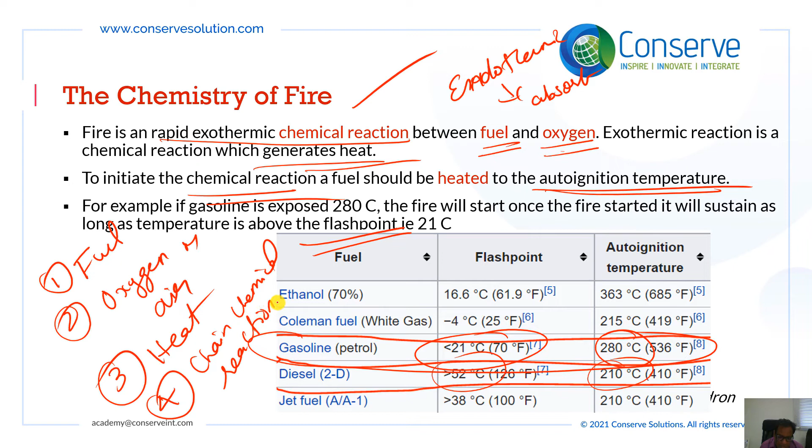And number three, the fuel will not get automatically fired. It has to be heated to the auto-ignition temperature. That is, heat is required to take the fuel to the auto-ignition temperature. And number four, there should be a continuous chemical reaction, that is a chain chemical reaction, the exothermic chemical reaction. So these are the four components required for fire to happen. These four components, the fuel, the oxygen, the heat, which is required to start the combustion, and the chemical reaction, are called the fire tetrahedron. A tetrahedron is a solid with four faces.

So the base is the chemical reaction and the three faces are oxygen, heat and the fuel. So the solid fire is a solid with four surfaces: chemical reaction, oxygen, heat and the fuel. So to extinguish the fire or to put off the fire, any one component of these four should be removed.

Either you should remove the fuel, you should remove the oxygen or cut off the oxygen, you should cool down below the flash point or fire point, or the chemical reactions should be stopped. So if you remove any one of these four components, the fire can be put off or extinguished. This is very important to understand to design a fire protection system.

So in this chapter, we discussed the importance and objectives of fire protection and life safety systems. Then we discussed various subsystems in fire protection and life safety systems. We discussed active and passive fire protection systems. We discussed the fire alarm system. We discussed the building egress or exit system, and we discussed the smoke management system. And finally, we concluded by understanding the chemistry of fire and the fire tetrahedron.

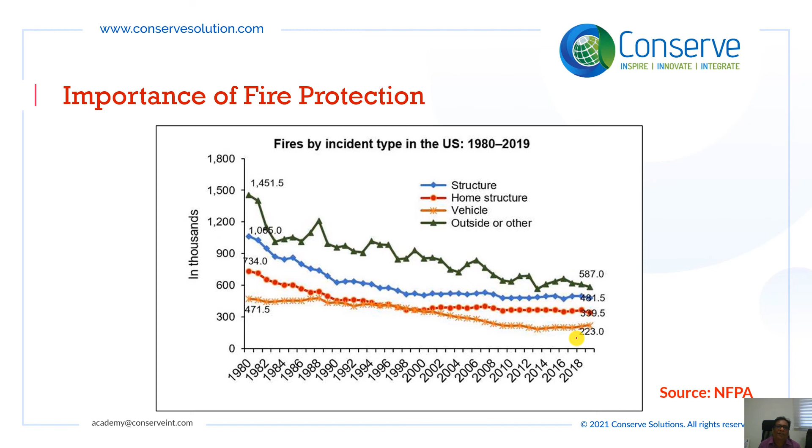Before concluding, let me quickly summarize our discussion in Chapter 1, Introduction to Fire Protection and Life Safety Systems. We discussed the importance of fire protection. There are a significant number of fire incidents which show that every building and every asset should have a life safety and fire protection system. There are two main objectives for a fire protection system. Number one, to protect the building occupants from injury and loss of life, and number two, to prevent damage to the property and valuables.

Systems in fire protection and life safety can be broadly classified into four. Number one, fire protection system, active and passive. Number two, fire alarm system. Number three, building egress system. And number four, smoke control system or smoke management system.

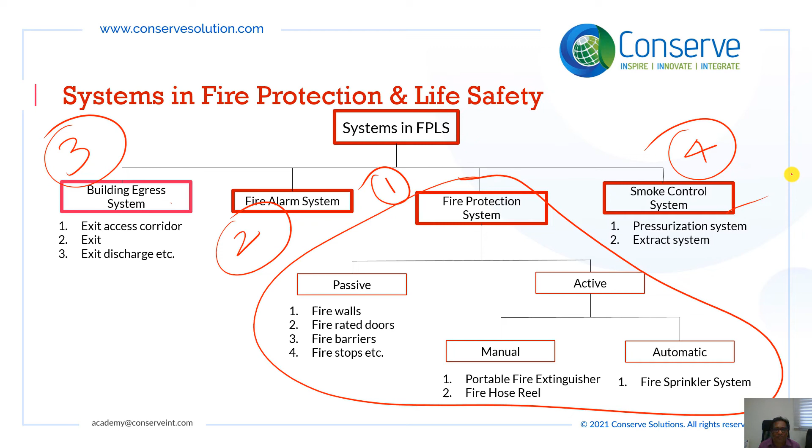Passive fire protection system aims to resist heat by having materials which can resist heat. For example, the walls and the floors should be fire rated. The fire rating is expressed in hours, 1 hour or 2 hours. So passive fire protection system aims to resist heat.

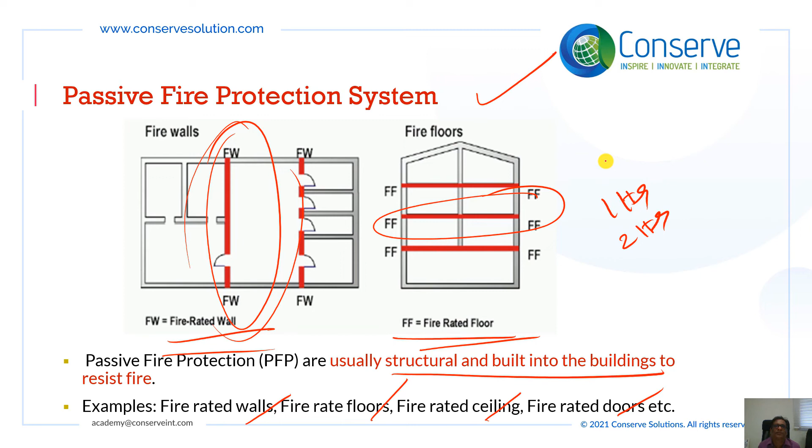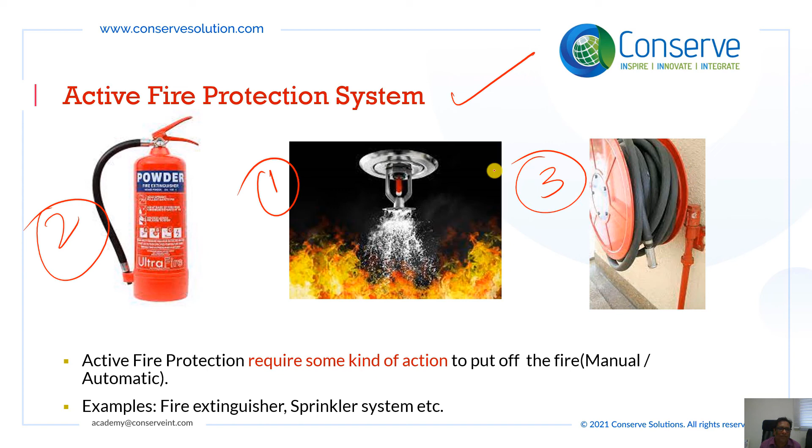Active fire protection system aims to put off fire by external means. The external means can be manual or automatic. So sprinklers are automatic, fire extinguishers are manual, and hose reel systems are manual. So we discussed all these systems in brief.

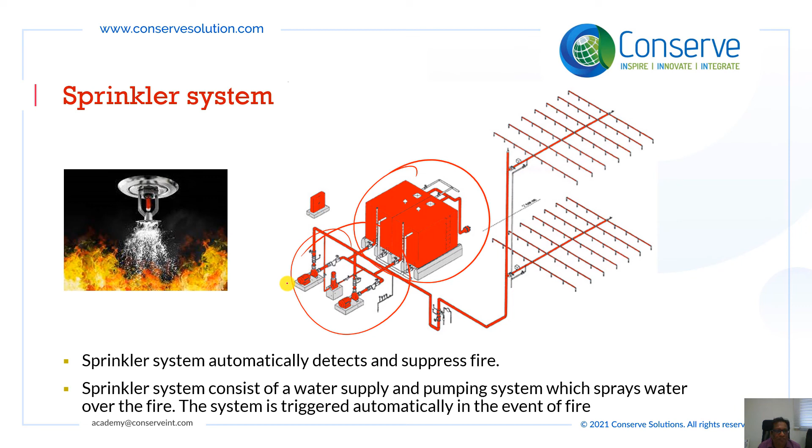Sprinkler and hose reel systems are connected to the same network of water tank and pumping system. Sprinklers are automatically triggered in case of fire. They spray water over the fire and extinguish the fire. The hose reel system is operated by the occupants. If they see any fire, they can use the hose reel to put out the fire.

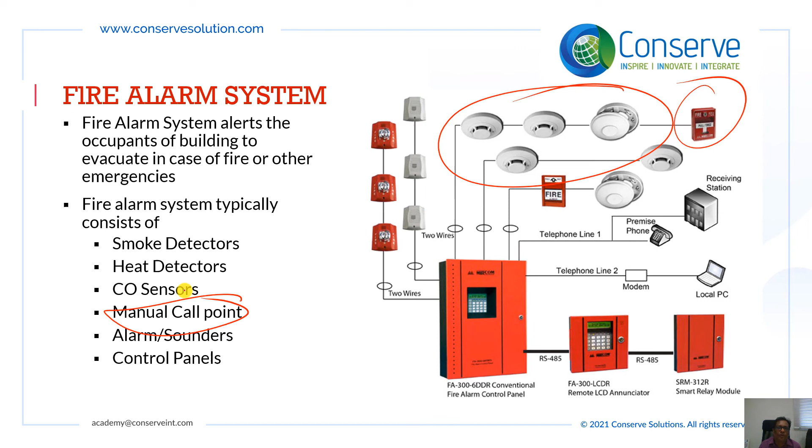Fire alarm system generates a sound in the event of fire or any emergencies. The fire alarm system can be triggered either by sensors. There are a lot of sensors, smoke sensors or carbon monoxide sensors or heat detectors, or they can also be triggered by a manual call point. So if anyone sees fire, they will switch the manual call point, which will trigger the fire alarm and generate a sound for everyone to evacuate the building. This is the fire alarm system.

And then we discussed the building egress system. Egress means exit. So the purpose of the building egress system is to provide a safe, unobstructed, protected pathway to exit the building in case of fire. So it has to be remembered that the egress route, the exit route, has to be protected by the smoke management system and passive fire protection system.

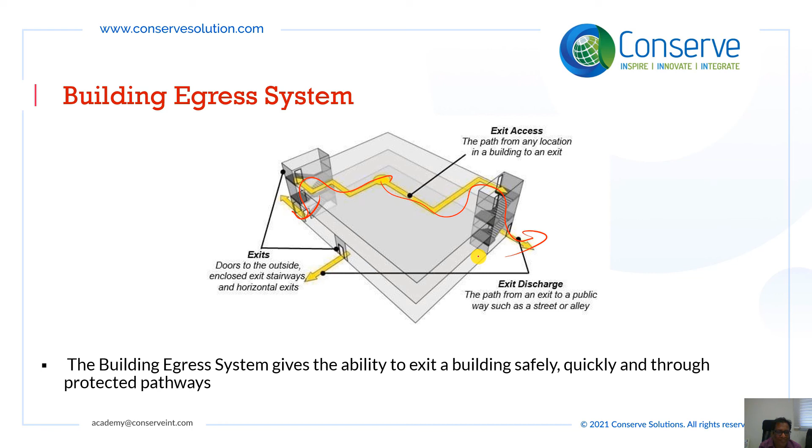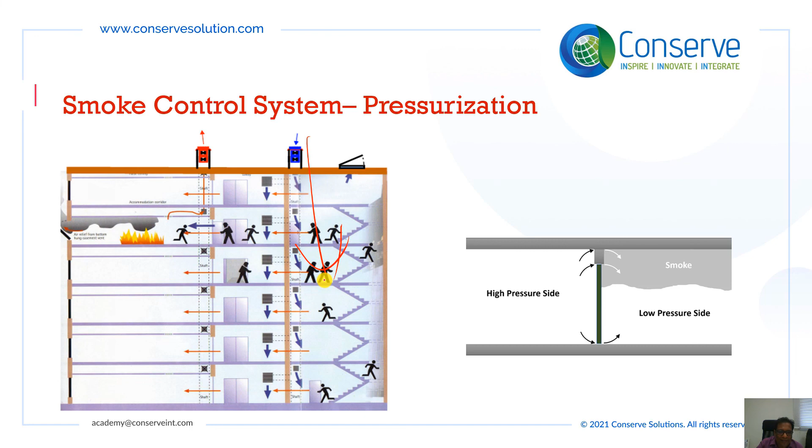Then we discussed the smoke control system. There are two types of smoke control system: pressurization system and extraction system. So the corridors and staircases have to be protected by pressurization so that the smoke does not enter these areas, because this is the exit way or the egress way. This should be protected from smoke and fire. So this should be pressurized. There will be airflow into these areas which will keep the area pressurized.

Smoke extraction is generally done in atriums or basements to remove the smoke. So generally one side of the building extracts the smoke and the other side of the building is pressurized to protect the egress way or exit route from smoke.

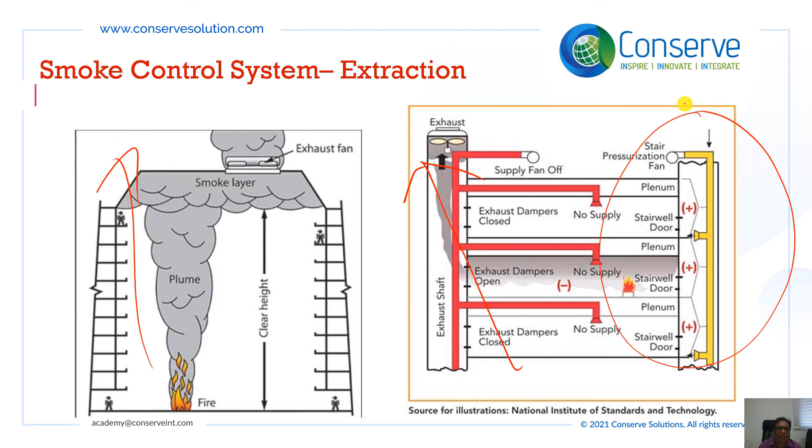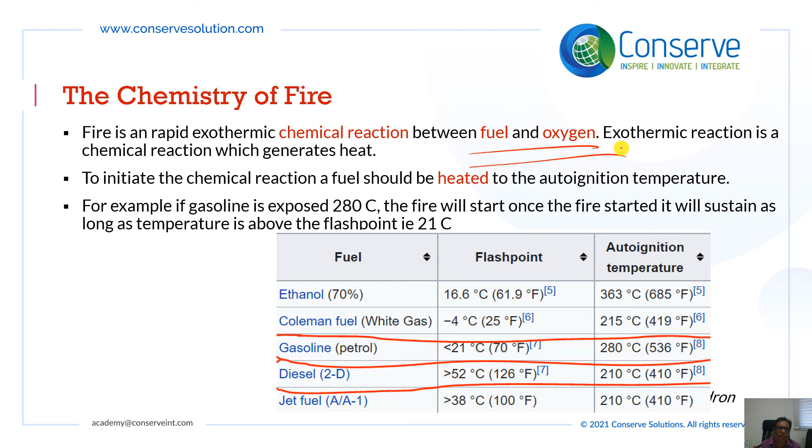And then we discussed the chemistry of fire. Fire is a rapid exothermic chemical reaction between fuel and oxygen. So there are four components in fire: one is the fuel, two oxygen, three heat, and the chemical reaction. These four components are called the fire tetrahedron. A tetrahedron is a solid with 4 surfaces. So the 4 components refer to the 4 surfaces of a tetrahedron.

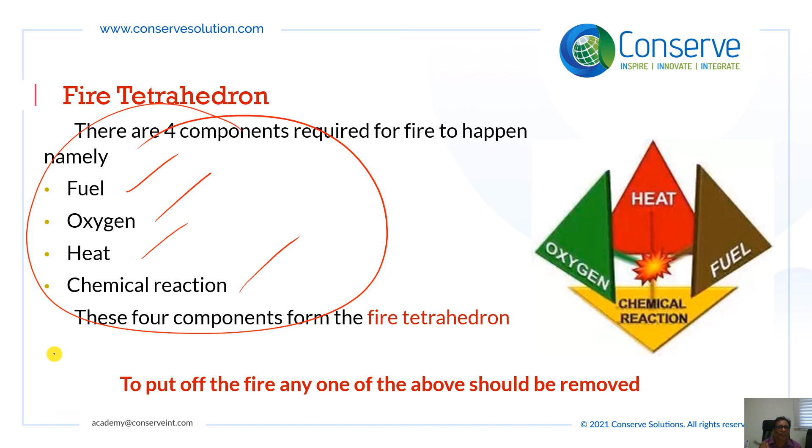To extinguish the fire, any one of the components has to be removed. The fuel has to be removed, or the oxygen supply has to be cut, the heat has to be cooled down, or the chemical reaction has to be cut. So if we remove any one of the 4 components of this fire tetrahedron, the fire is extinguished. Hope you had a very good understanding of the contents we discussed.